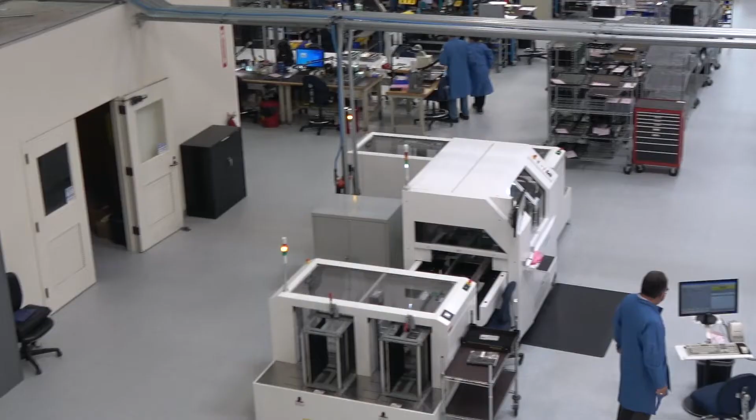Advanced Motion Controls was founded in 1987. The two gentlemen that founded the company are still involved in the business today. And that's important because the core values and the culture that the company started with have continued through today. We've shipped over 3 million servo drives around the world. Our headquarters is in Camarillo, California. We have an 86,000 square foot facility that houses all of our engineering, sales, support, design, and our manufacturing.

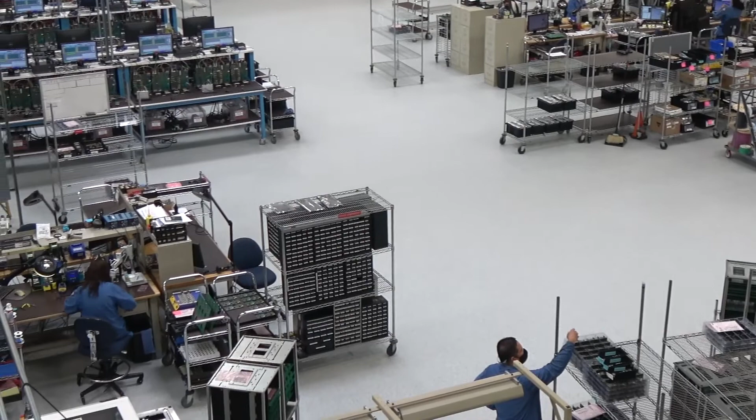One of the things that sets us apart are our people and our support capabilities. We have over 140 people here in the headquarters, of which 40% are degreed engineers. In addition to the support that you can get directly from the product and support group, we also make our development engineers available to our customers whenever it's needed to provide that extra level of support. Outside of our internal support, we have over 40 channel partners around the world with over 300 associates, and about 130 of those have been to the factory for training. And so we have factory trained support all around the world.

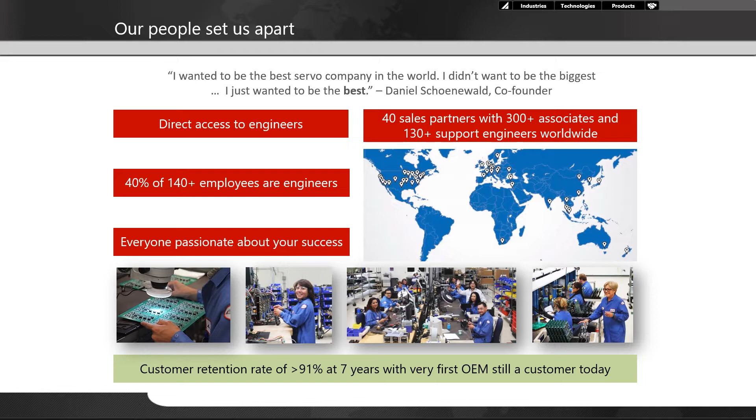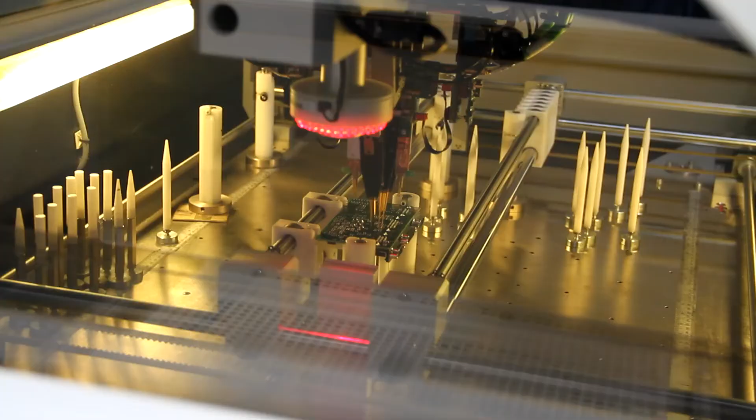One of the keys to our success is the flexibility that we have in manufacturing, because we have all of that manufacturing at our headquarters in California. We do 100% complete testing. Our flexibility allows us to prioritize and schedule to meet our customer needs. We routinely ship over 98% to our promise date and over 90% to the date our customer requests at the time of order. It also gives us great control over quality and reliability. Our average return rate is less than 0.5%.

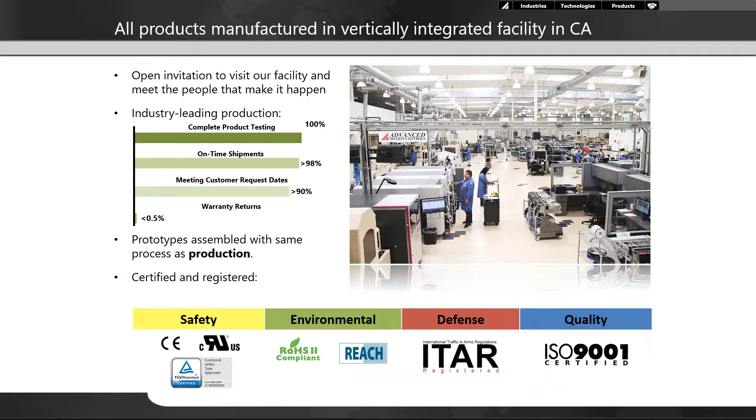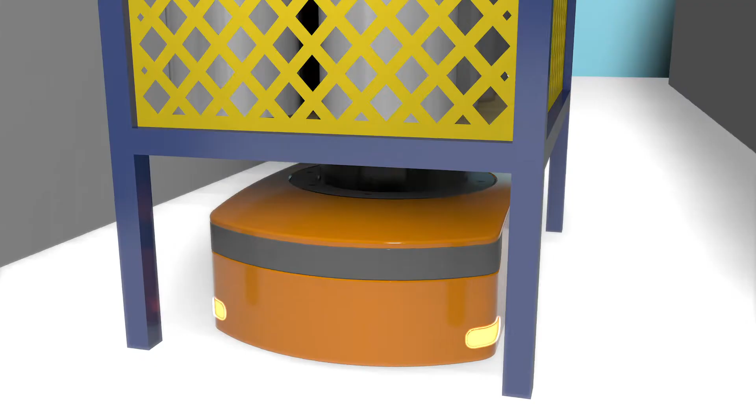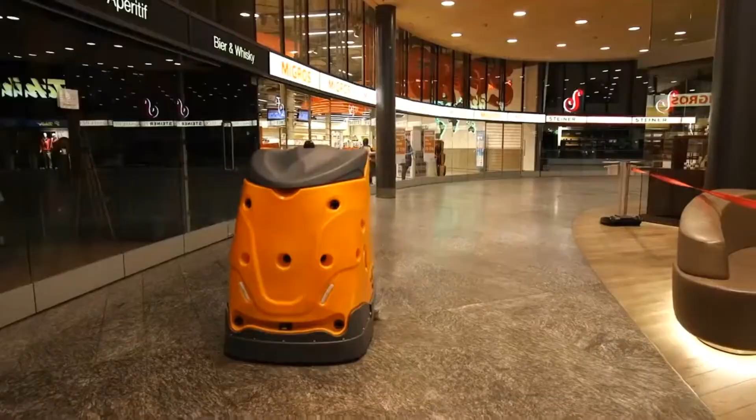All right, thanks, David. Today we're talking about servo drives for mobile robots and cobots. So I'm going to start with a quick introduction. Mobile robots can be used pretty much anywhere, but we're seeing exceptional growth in automated warehouses where AGVs are used to fulfill online orders, in hospitals, for example, pharmaceuticals. This is where a robot stores and transports medication to a patient's room in the hospital. Also in hospitals as service bots where they do laundry delivery, so delivering fresh linens to the rooms, or taking dirty linens to be laundered. Or even at grocery stores, in airports for automated floor cleaners. Also in grocery stores and big box stores, mobile robots are used for tracking inventory.

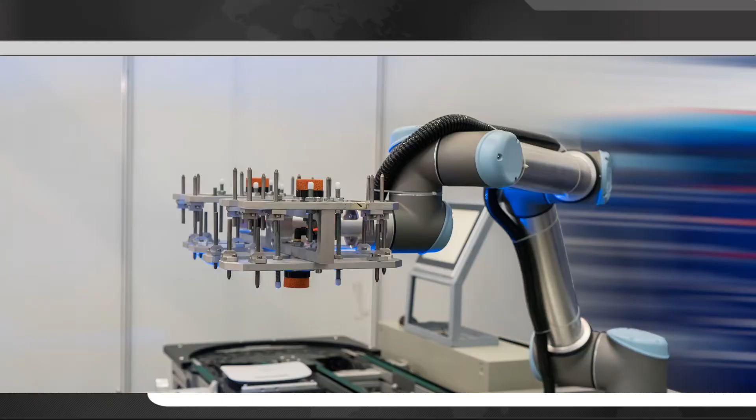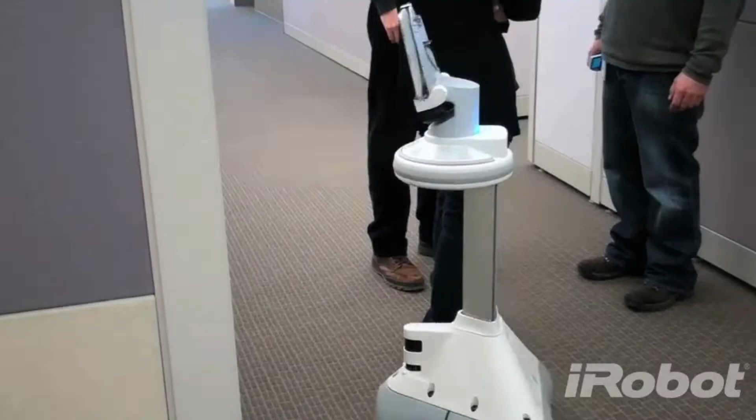Cobots or collaborative robots take the shape of an arm and are usually mounted to a fixed location, but they can also be mounted to a mobile platform, which allows them to move and work where needed. Cobots work in close proximity to people and other robots. They're designed to be versatile so they can handle a multitude of repetitive tasks like moving, sorting, packing, and assembly.

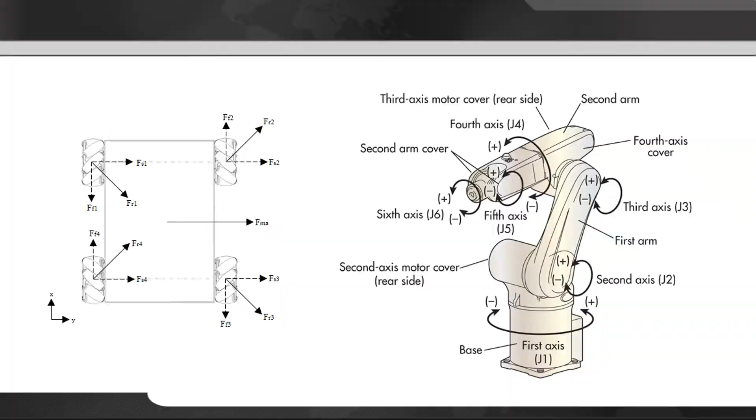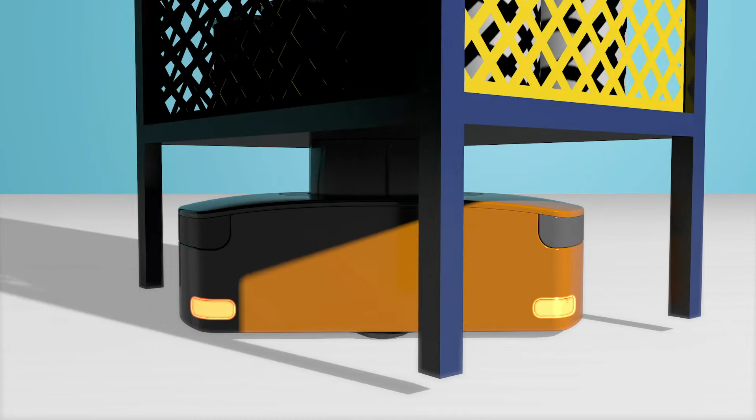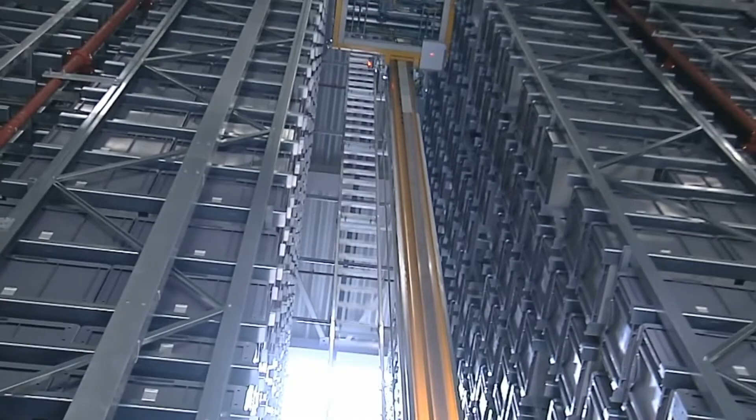In both mobile robot and cobot applications, for every axis of motion, there needs to be a motor to drive it. And to drive each motor with precision, there needs to be a servo drive to supply the power and motion control. This means for every traction wheel on an AGV, or every degree of freedom on a robot arm, there needs to be a servo drive. But regardless of the different applications and different jobs for each axis, when it comes to the servo drives that power them, mobile robots and cobot applications have a lot of requirements in common. So even if the application looks different on the surface, the requirements for the servo drives are actually similar.

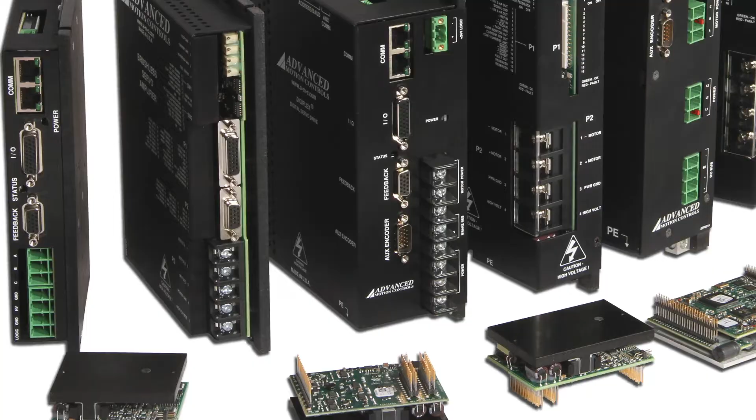So what are the requirements for cobots and mobile robots, and how does AMC fit in? First of all, we have 220 standard off-the-shelf servo drives to choose from. Within this group are a lot of great choices. So I'm going to break this down into the attributes that are important for cobots and robots.

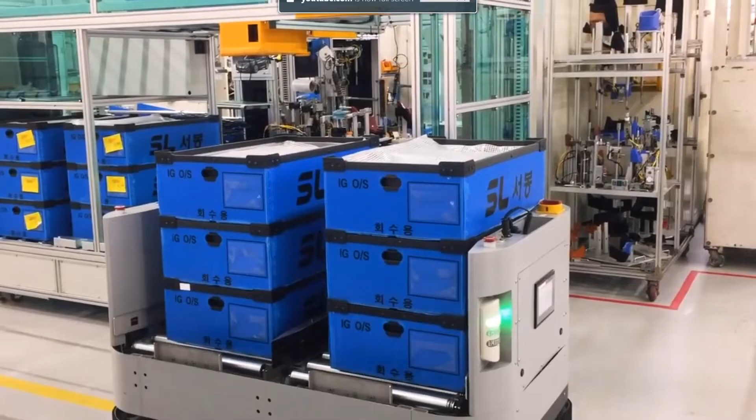With regard to voltage, compared to traditional factory applications, mobile robots and cobots operate with a relatively low DC supply voltage, typically in the range of 10 to 100 volts DC. This is mostly due to the availability of batteries and safety, although higher voltage systems also exist, for example with industrial robots and agricultural robots.

In the low voltage category, our standard products operate over a wide range. For example, 10 to 55 volts, 20 to 80 volts, and 40 to 175 volts DC are typical operating voltage ranges for our products. The benefit of wide ranges is especially important with battery applications because the difference between a fully charged battery at the beginning of a shift versus a drained battery at the end can be pretty big.

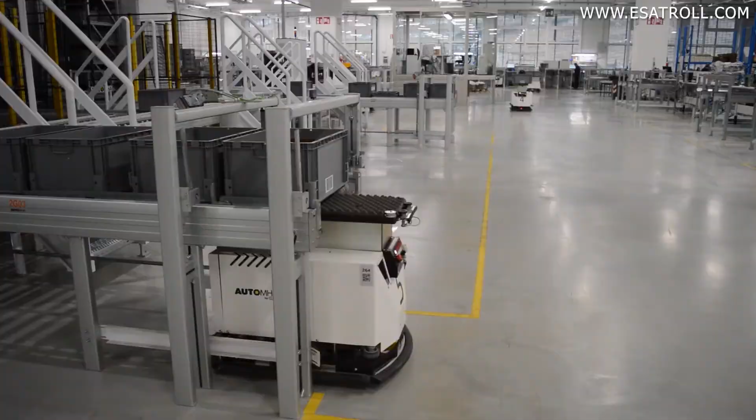And regardless of what the input voltage is, the servo drive performance should remain the same throughout the range, meaning the responsiveness needs to be the same as well as the torque output and tuning, although admittedly the top speed may suffer when the voltage is low.

Almost everyone wants more torque, which really means they need more current. Anywhere from 5 amps to 100 amps is a typical requirement and can easily be satisfied with our standard product offering. Even higher currents are available with some of our products like our vehicle mount drives. High current output is needed for axes like traction wheels on an AGV or the base joints on a robot arm.

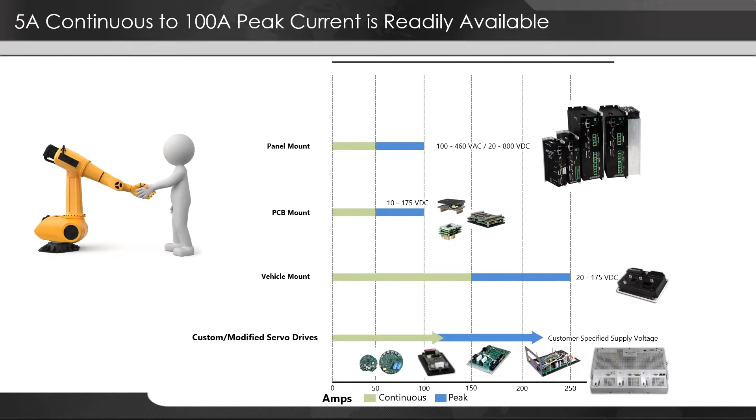Efficiency plays a critical role when batteries are the source of power. The higher the efficiency, the less wasted energy. This means robots can run longer because their batteries last longer. At AMC, all of our products use some form of PWM switching, which makes them inherently efficient.

The point is, the power devices, either the FETs or IGBTs, turn all the way on or all the way off, with very little time in the linear region where energy is wasted. The result is efficiency, usually between 95 and 99%, depending on the model. More efficiency means longer battery life.

Also, being more efficient goes hand in hand with being more thermally efficient, which means there's less heat generated by the servo drive. This is extremely important when space is limited, like with cobots and mobile robots, because when servo drives and other electronics are packed into tight spaces, the heat tends to build up. Thermally efficient electronics are much easier to work with because they run cooler.

Another consideration for efficiency is we have 4-quadrant operation, including for single-phase and 3-phase servos, as well as trapezoidal and sinusoidal commutation. 4-quadrant means the servo can push current in both the forward and reverse direction, as well as regen in both directions. So what's regen or regeneration? This is when the power flows from the motor back to the supply during braking.

In the past, this was often considered a nuisance, since it would cause overvoltage issues and make machines shut off. But now with battery applications, regeneration is a desired feature. It's actually an integral part of maintaining the highest amount of efficiency and recovering as much spent energy as possible. In the past, excess regeneration energy would be burned off in a resistor. Now it's used to recharge the battery.

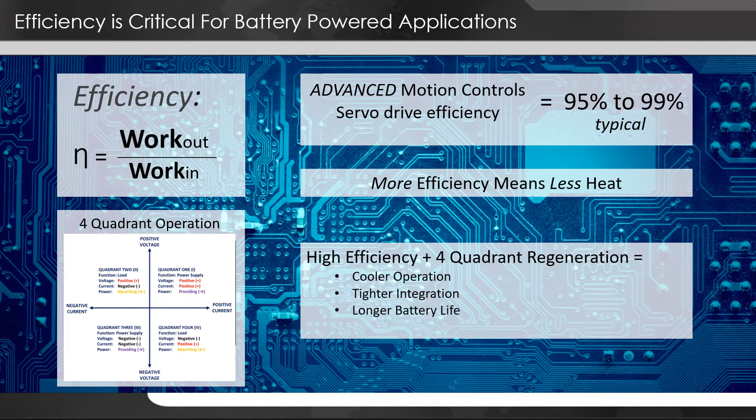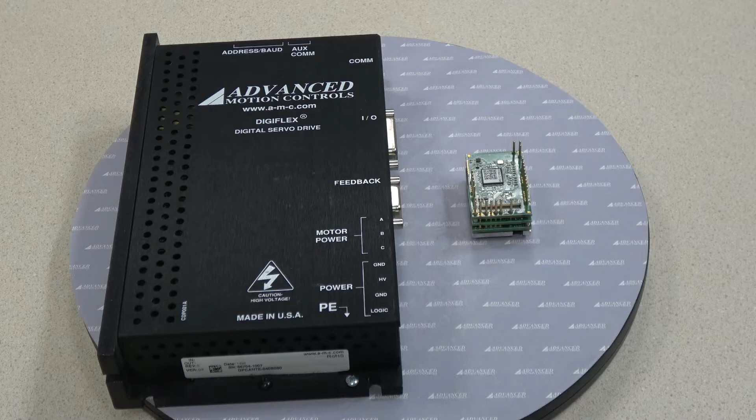Our products are not only known for their high power, but their high power density. In simple terms, high power density means increasing the amount of power per volume. If you provide the same amount of power but in a smaller package, then you've increased the power density. For example, these two servo drives can output about the same amount of power, but this one has much higher power density since it is so much smaller.

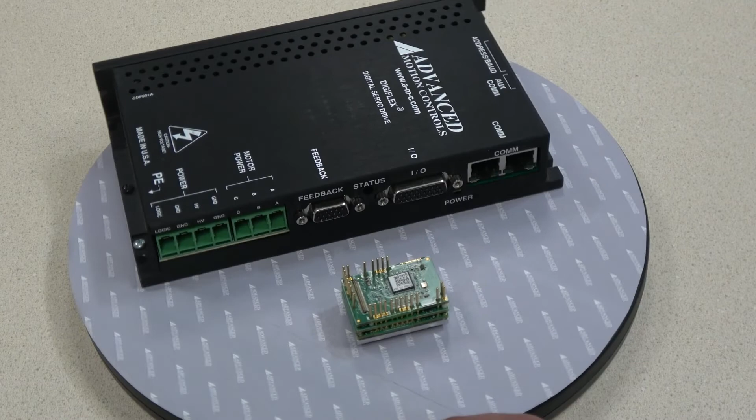The advantage of high power density is it makes it easier to fit more power into a smaller space, an extremely important consideration in AGVs and robotic arms. Also, with the smaller physical size comes reduced weight. Every gram of mass saved increases the payload capacity. The reduction in dead weight also helps with overall system efficiency because there's less weight to move around, accelerate, or lift.

Networked servo drives are definitely the way to go with cobots because they greatly simplify wiring. A compact drive on a network can be mounted right next to the motor in a cobot arm. All the feedback signals can then be processed in the drive along with any I/O signals.

The servo drive can then make the signals available on the network for the controller to access. This eliminates most of the wiring that would otherwise have to feed down the arm. Multiplied by each axis of motion in the arm, this means 50, 75, or more wires can be eliminated.

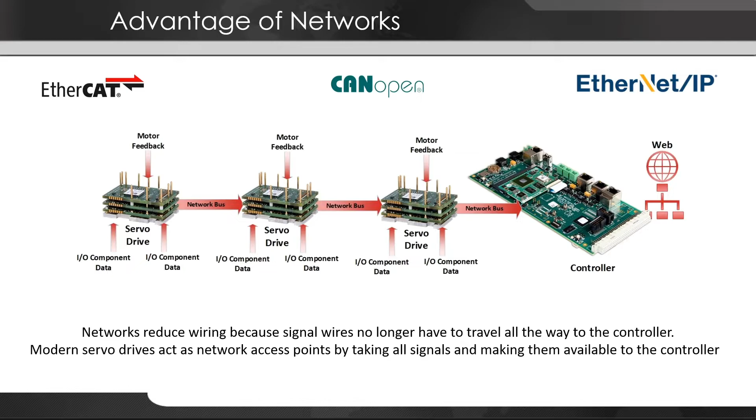Safety is a top concern because AGVs and cobots work near and around people. Safe torque off, or STO, cuts all power to the motor. This safety feature is necessary when someone is servicing a robot because there needs to be absolute certainty that a motor can't suddenly turn on and accelerate, causing injuries.

People might equate this to an inhibit function, but this would only be half right. The difference between an inhibit and safe torque off is the inhibit is done solely through the servo drive's logic. This means a logic glitch or poor grounding could allow the motor to start up again. With safe torque off, the drive's logic is taken out of the equation.

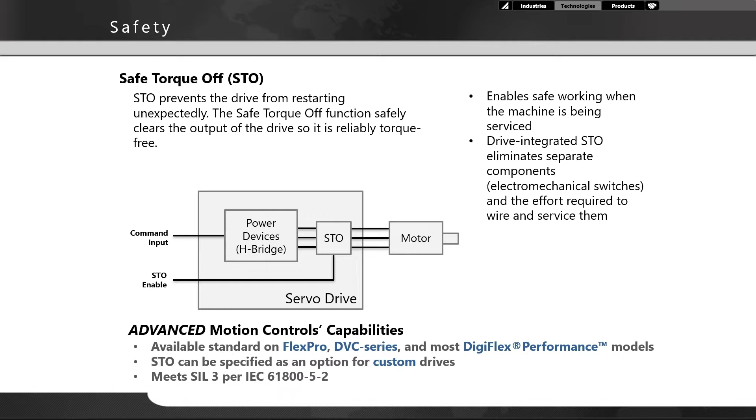With STO, there's a physical disconnect on a hardware level between the drive's power devices and the motor phase terminals, making it virtually impossible for the motor to accidentally start up. To start the motor again, STO must be disabled manually before the drive can be re-enabled.

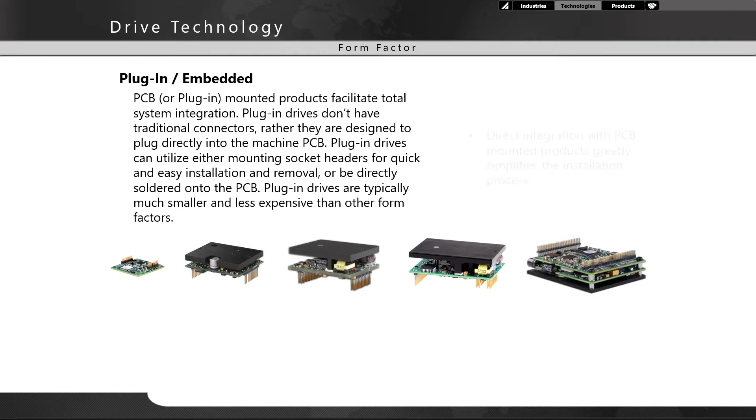Form factors. PCB mount is our most integrated form factor. With this style, you design your PCB to accept the servo drive directly on the board. To get the full advantage of this form factor, you would design the PCB board in such a way as to be laid out in the shape that you need, and if necessary, include multiple axes on one board.

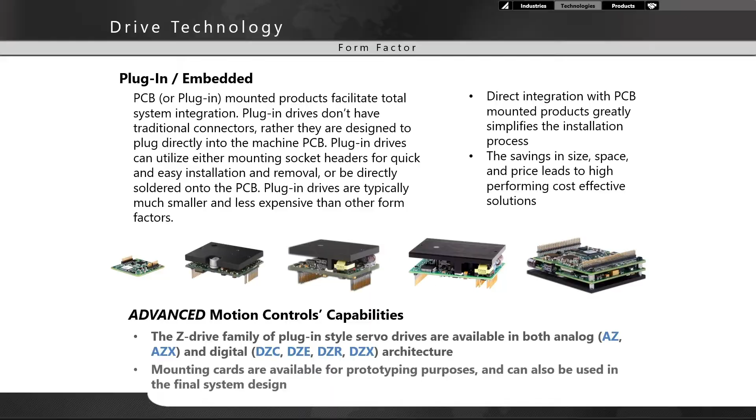Further advantages can be achieved by designing easy connection to the motor and feedback cables, as well as tying together the network comms, especially if there are multiple axes. Traces and connectivity for I/O should also be included. Think of the PCB mount form factor as an easy way to do your own custom, but you don't need to design the servo drives. You just need to integrate them.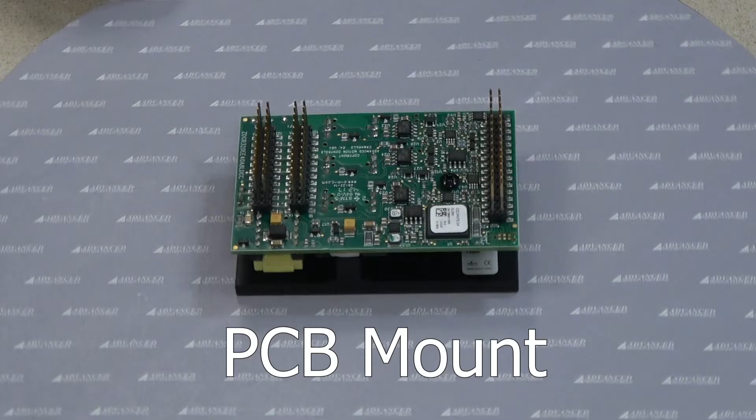The advantage is the tightest integration with extremely reliable connectivity since cables are replaced with traces. Disadvantage, it's an open design, so not as protected, and you need to really plan out the layout and connectivity since it's more of a commitment to spin a dedicated board.

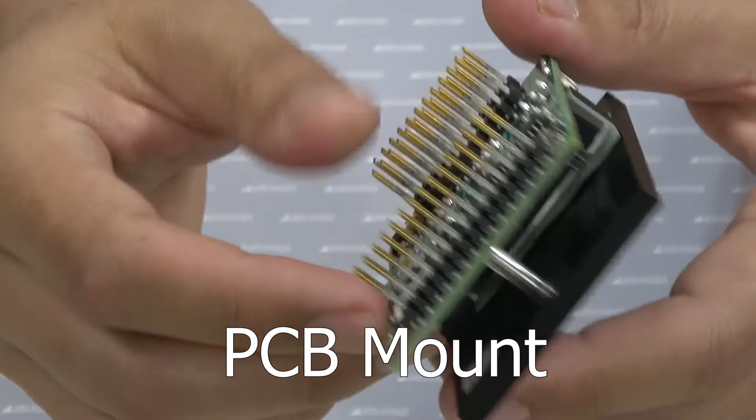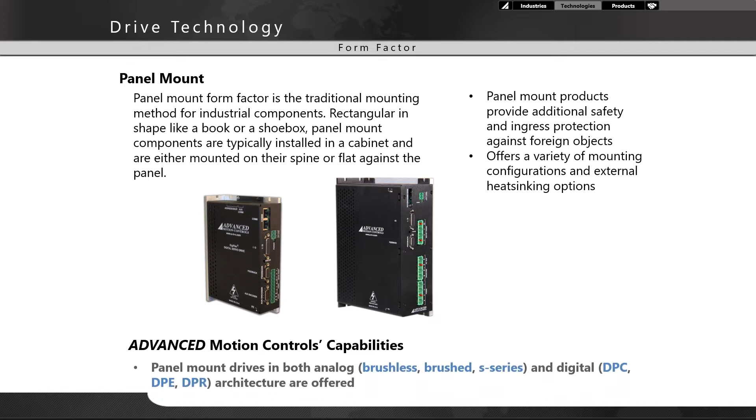Machine embedded is similar to the PCB mount style, but with an interface board attached. This allows for more traditional connections like cables with connectors. Advantage, it's more standalone. Disadvantage, it's still an open design. Panel mount, this is the traditional servo drive in a rectangular case. They're larger than the embedded style of drives, but they have bigger connectors and sturdier mounting options.

Advantage, they're well protected with a metal or plastic cover, larger connectors with easier access. Disadvantage, these may be harder to place due to their size. They're also heavier.

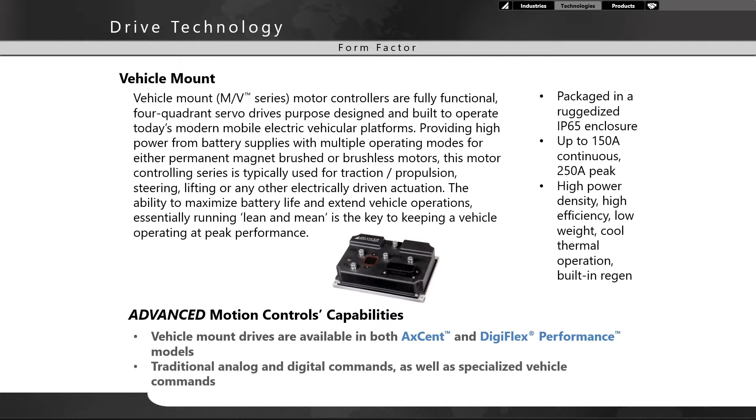Vehicle mount, designed with electric vehicle requirements in mind, although they're still servo drives, so there's no sacrifice in performance. They use automotive style connectors for signals and large lugs for power. So the advantage, it's the most protected design. It's a heavy duty build. Disadvantage, it may be too bulky.

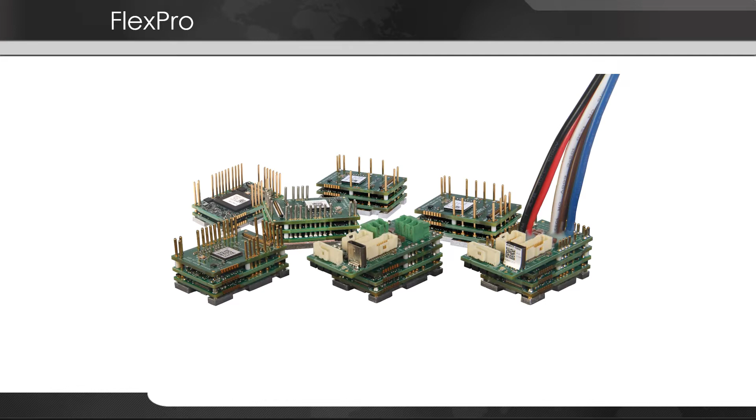Let's focus on FlexPro. FlexPro is our premier line of servo drives. They're a showcase of our latest technologies and capabilities and are designed for high power and small size. With our impact architecture, we've achieved incredibly high power densities while still maintaining our reputation for reliability and versatility.

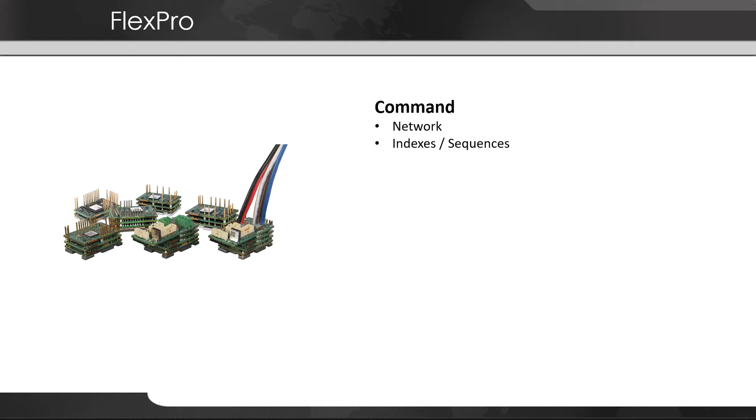FlexPro drives are designed to operate within a network, but like previous digital drives, they can also operate standalone with control via stored indexes and sequences using I/O. They're capable of running brushed, brushless, stepper, rotary, and linear motors.

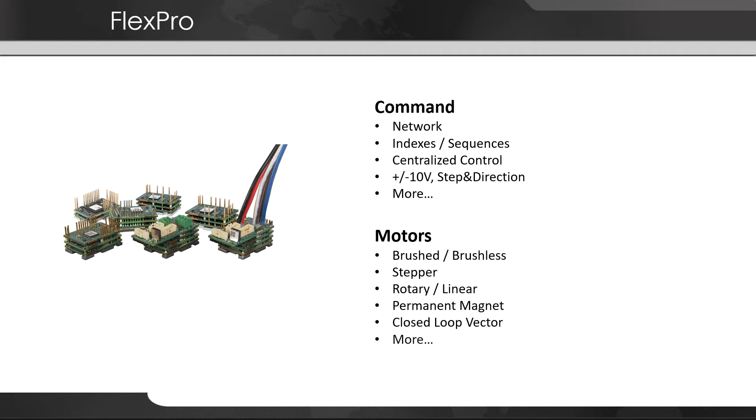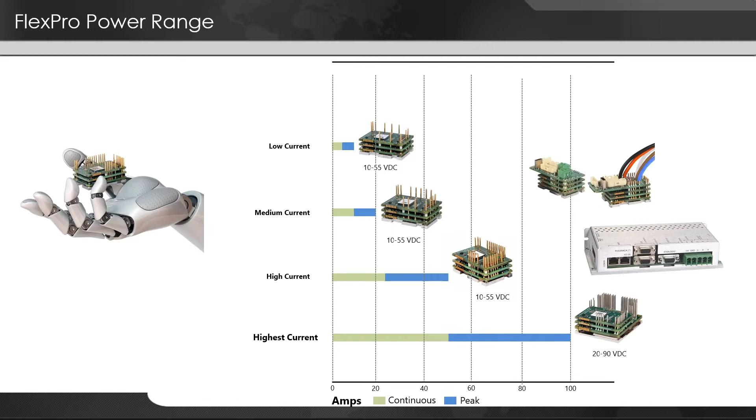They range in power from as low as 5 amps continuous up to 50 amps continuous and 100 amps peak. For voltage, they work with as low as 10 volts DC up to 90 volts DC, with options up to 200 volts DC in the near future. We offer two sizes, the micro and the mini.

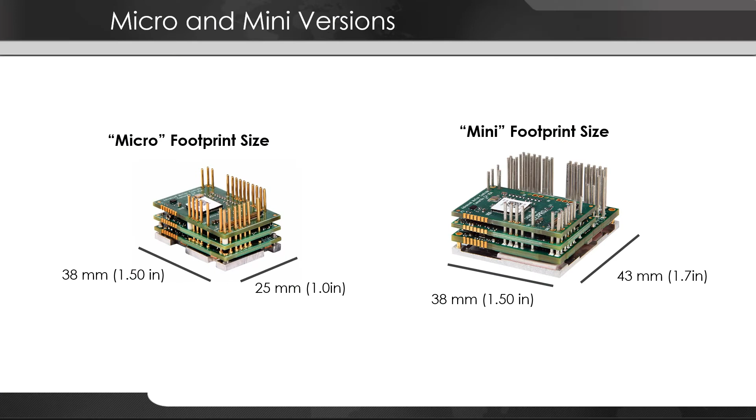The micro size has a footprint of 38 millimeters by 25 millimeters, which means 4 of these can fit onto a business card. The mini size has a footprint of 43 millimeters by 38 millimeters, which means 2 of these can fit on a business card with room to spare.

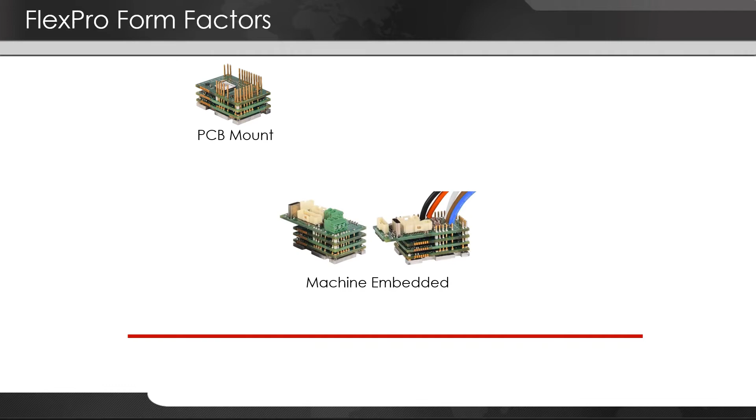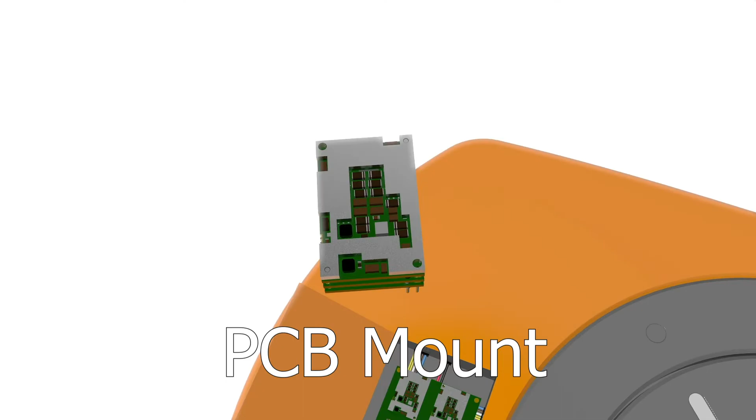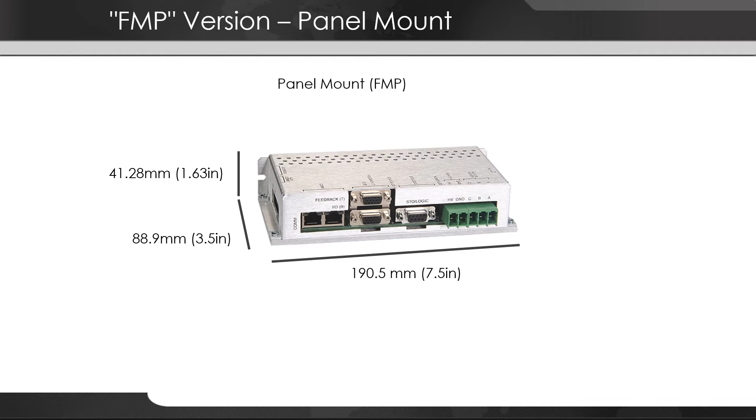Form factors. FlexPro drives come in 3 form factors. PCB mount for fully embedded and integrated installations. These are great for multi-axis applications; we can mix and match as many FlexPro drives as you need onto a single PCB. Machine embedded, these drives are the halfway point between PCB mount and panel mount. They have an open, caseless design, but they use standard connectors and lugs for connectivity. Panel mount. This is the traditional rectangular case that most people associate with servo drives.

And one more form factor worth mentioning is the development board. Since the FlexPro models are so small, we also have available an embedded style FlexPro mounted to a larger PCB with full-size connectors for main power, network, motor power, and feedback.

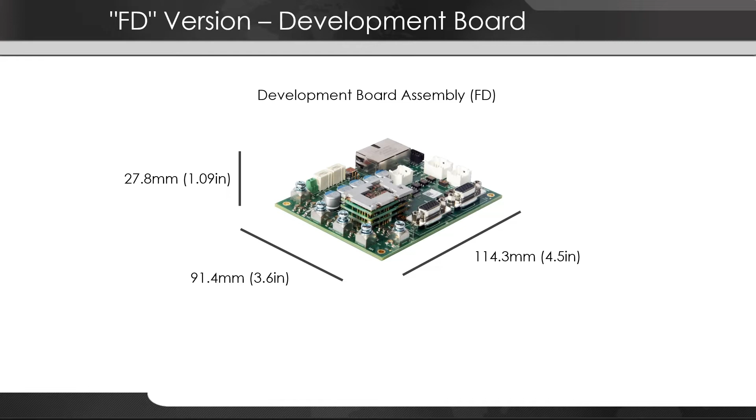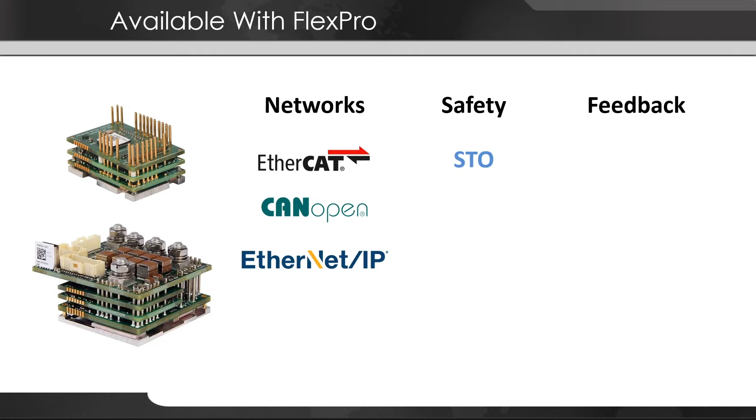The FlexPro family has options for EtherCAT, CANopen, and EtherNet/IP, giving full control and access to drive stats and I/O over the network. For safety, all FlexPro drives include STO functionality. Feedback. FlexPro drives have numerous feedback options including absolute encoder, BiSS-C, EnDat, incremental encoder, Hall sensors, and more to come.

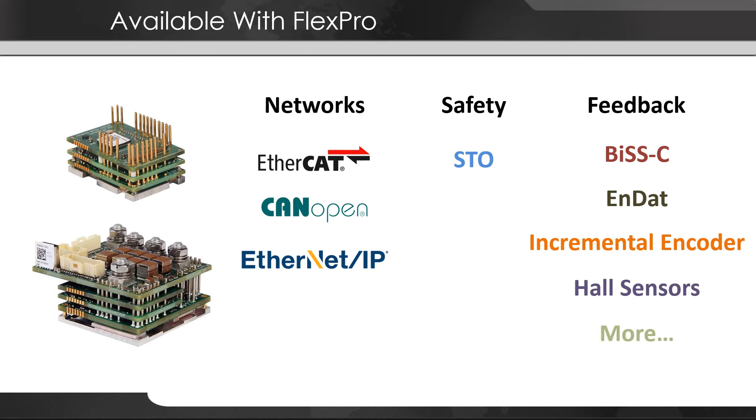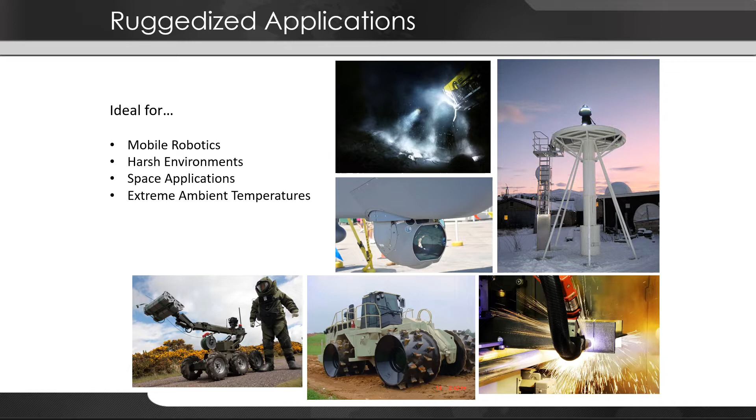Extended environment. FlexPro has a complete subset of models designed to operate in extended environments. They've been ruggedized to work in different applications like high temperatures or high vibration, both of which are common with cobots and mobile robots. They have an extended temperature range of -40 to 95 degrees Celsius.

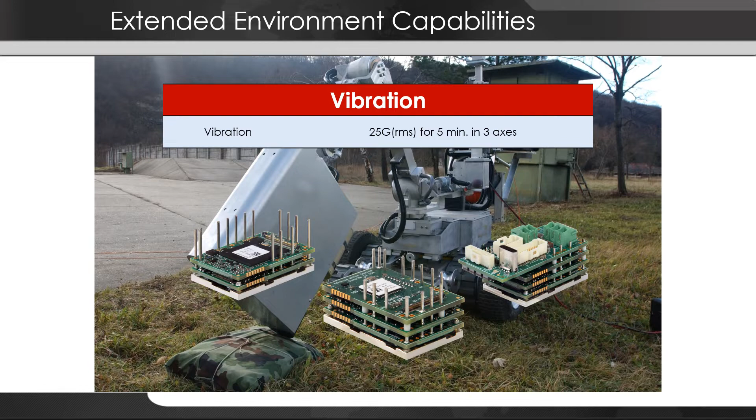They're protected against 95% non-condensing humidity and pollution degree 2, and they're tested to withstand vibration up to 5 minutes of 25 Gs RMS in 3 axes of vibration.

Thanks, Rene. That was great.

In addition to all these standard products, and you can go to our website and see them all online, that only represents about 1/3 of our revenue. Another third of our revenue are modified versions of those standards. So we can tweak small things like resistors, capacitors, maybe even special firmware, things like that.

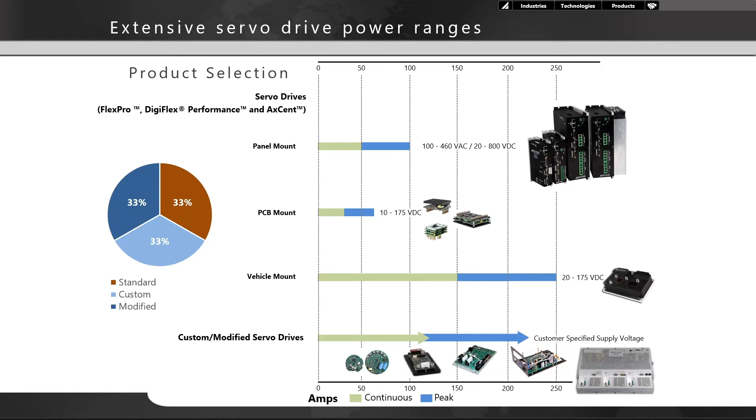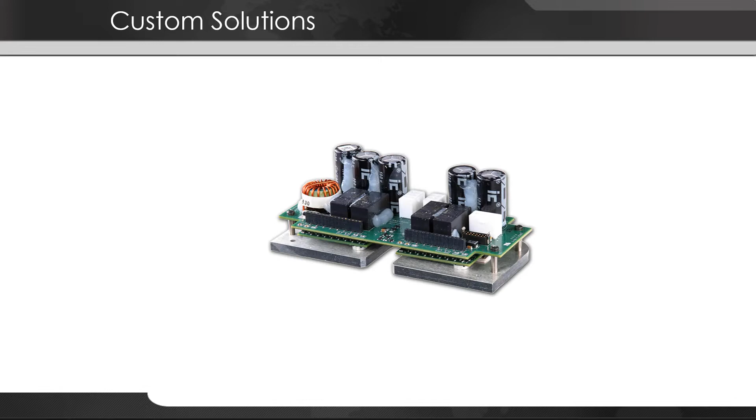But then the final third of our revenue is custom solutions, where we are taking our core building block, a standard product, the standard circuits that go into that product, and customizing it for shape or power, voltage, current, inputs and outputs, special connectors, things like that, to give the OEM customer exactly what they want.

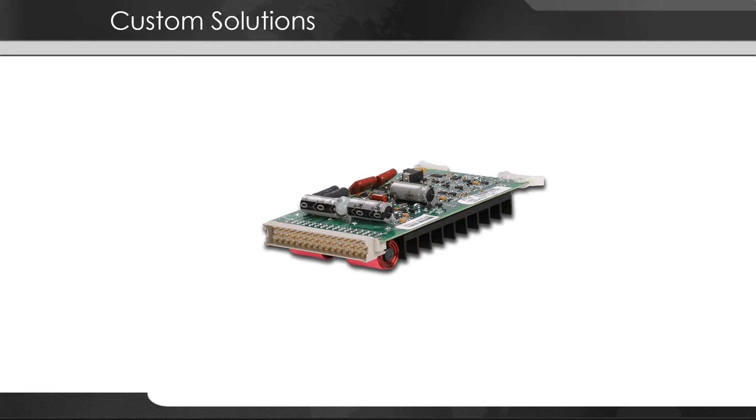One of the keys in getting good to great in mobile robotics is being able to have a solution that's optimized for the application. Every application is different, every customer's needs are different, and the ability to customize on the product level, and sometimes even on the commercial level, is very important.

And the way that Advanced Motion Controls is structured lends itself very well to being customized and optimized. And we like to think of ourselves as an extension of our customer's engineering team. So we have a very close collaboration between our applications department, our engineering group, as well as the customers.

We build all of our prototypes on the same equipment and the same process that we do for our standard products. So we have that proven recipe already built in. And our experience of over 30 years, coupled with our in-house facilities and capabilities, produce reliable custom solutions much faster than the other suppliers in the market. Many of our competitors don't even offer custom solutions.

So an example of one of our custom applications is a floor cleaning robot. The customer had started using one of our standard embedded style drives plugged into their own mounting card and an IP65 enclosure. And they recognized that their forte was building robots and the controls of robots, not necessarily the drive itself. So we collaborated on a turnkey solution where we provided a fully enclosed IP65 totally sealed solution. So the building block was still that standard drive.

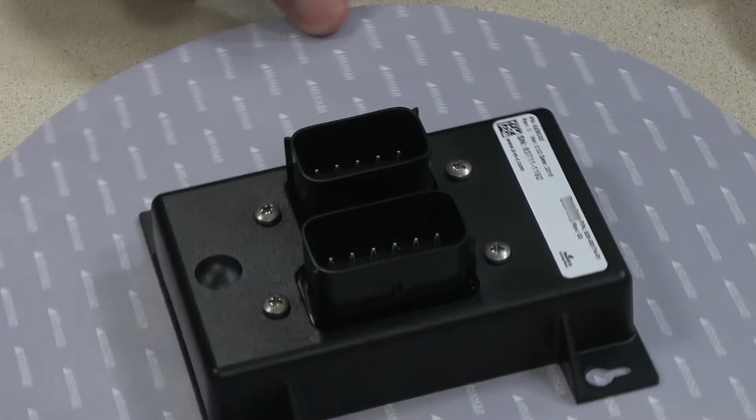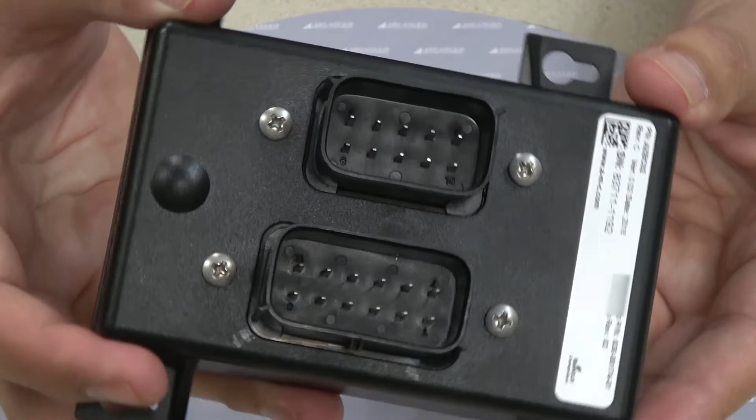We created a mounting card that had exactly the features that they needed. It was the same size as their own design, so the fit was the same. We mimicked the function, so there were special relays, temperature control, safety mechanisms that they had designed on their mounting card, and we put that onto our design. Added a couple waterproof connectors, put that into a plastic housing and completely filled the cavity with potting compound to make a 100% sealed solution.

This gave them the ease of buying one part, taking it right from their stock, mounting it right to the robot in the same fashion that they had mounted their own design with the same cables, because we had used the connectors they used. It lowered their costs, increased their quality, and made it simpler for their supply chain because now they were buying just one part as opposed to all the different parts to put together that assembly.

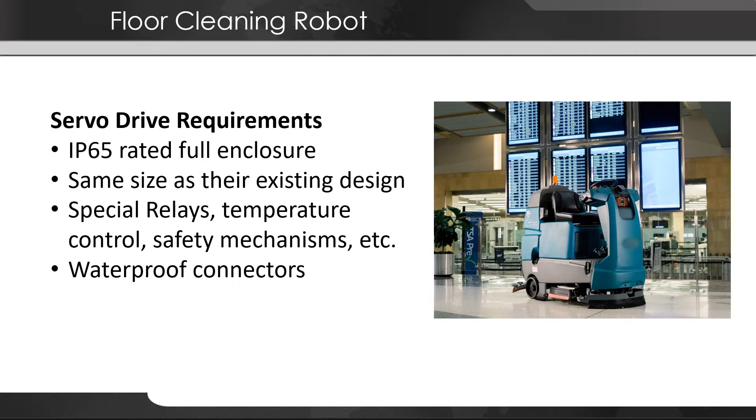Another one of our custom examples is a customer making an articulated robot that goes on top of a mobile robot. For the articulated part of the robot, it was very important to keep the size as compact as possible. And to do that, they wanted to have the drive fit right in each joint of the robot. So it had to be small, circular, and donut style with a hole in the middle for wires to go up through the drive to the next joint and the joint after that. This was an EtherCAT solution, so the communication between the host and our drive is EtherCAT.

We worked together with the customer to determine the exact size, the exact mounting holes, and what was very important was efficiency, because there's not a lot of extra space to mount the power devices, which are the heat generating part of the design, to the metal housing. So we had to be very efficient to allow for natural cooling.

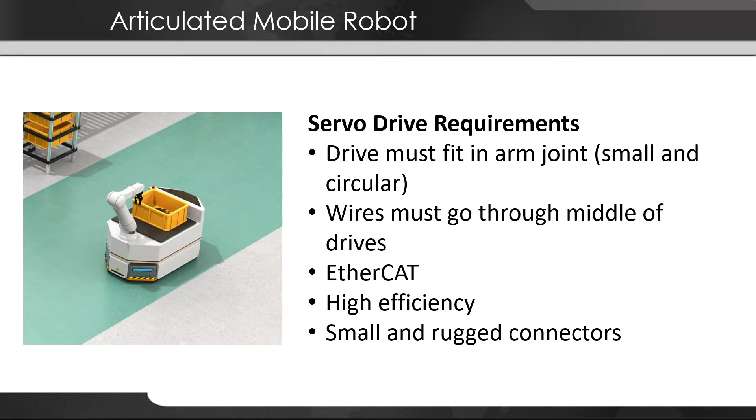And the other issue that was very important to them was connectivity. They had very specific requirements when it came to connectorization, because the connectors had to be small to keep the whole design small, but they also had to be very rugged and reliable, because this 6 degree of freedom robot is moving a lot.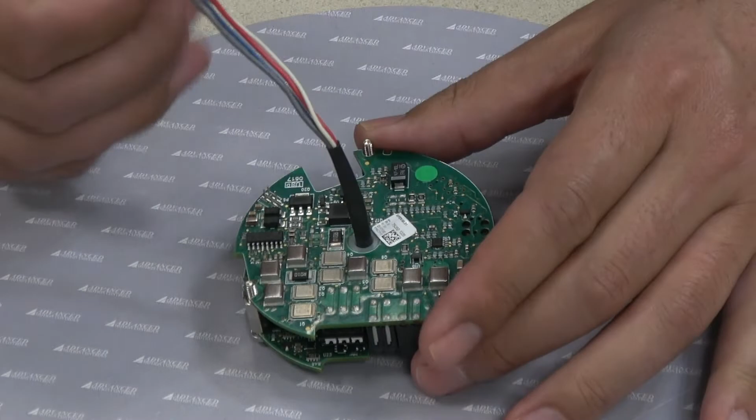And so there's going to be stress on the wires as it's moving around. So the ability to have robust connectors was very important. In addition to that, we added some features just for them: a special brake function, a special torque sensor function, in addition to sensing the torque of the motor, and a couple other features that will set them apart from their competition. And it was a really good example of how the two engineering teams working together as one could produce something better than either they or us could do by ourselves.

Another application was for a different floor scrubbing and floor cleaning robot. And the special need in this application was dual axis. So they wanted to have 2 axes on one drive, and all of the filtering necessary for them to meet their emissions requirements. A lot of times customers will handle emissions external to the servo drive itself, but in this case they wanted a turnkey solution where they did not have to add any additional equipment or accessories to the drive in order to get it to pass the testing that they required.

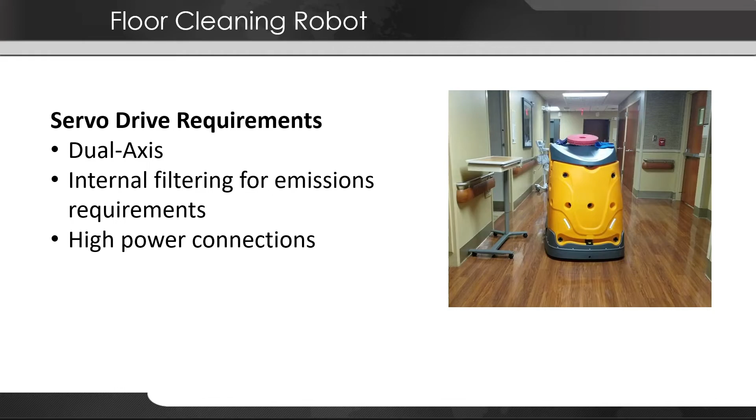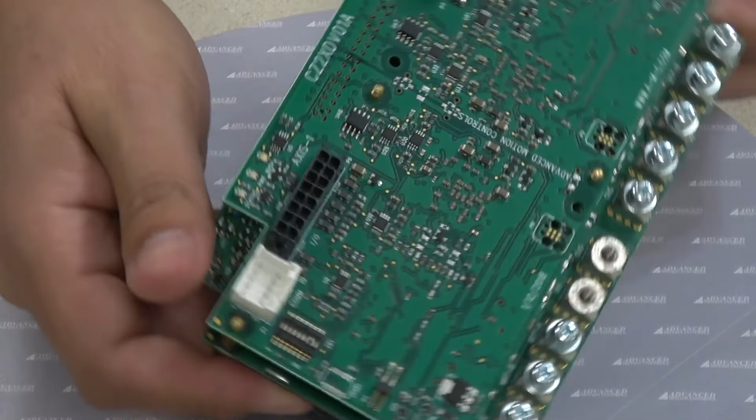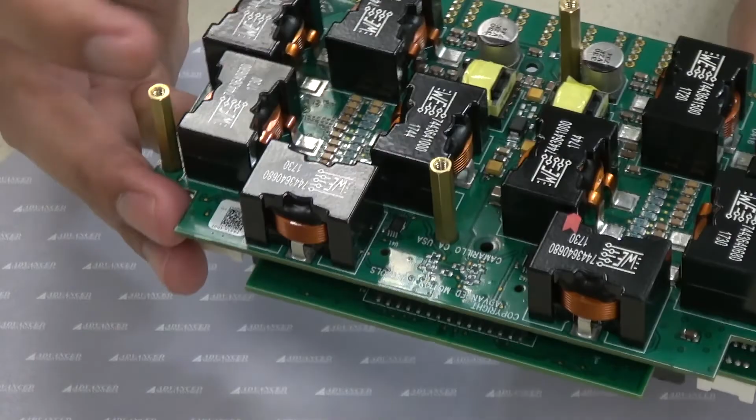So we took 2 standard embedded style drives that were slightly modified for voltage and current and installed those on a custom printed circuit board, acting as their mounting card, with high power, high current lugs for the input power and the output power to the motor, as well as the signal connectors of their choosing. So they had exactly what they wanted, and that helped them with their cabling. And on the opposite side of the mounting card, all of the inductors and filters necessary to keep the EMC and the emissions both conducted and emitted to a level that they required.

Again, this helped them ease their supply chain by being able to buy one part as opposed to maybe 2, 3, or 4 different pieces to put together themselves. They could buy one part and stock it, which kept their costs down and made it much simpler to stock the product as well as manufacture the product.

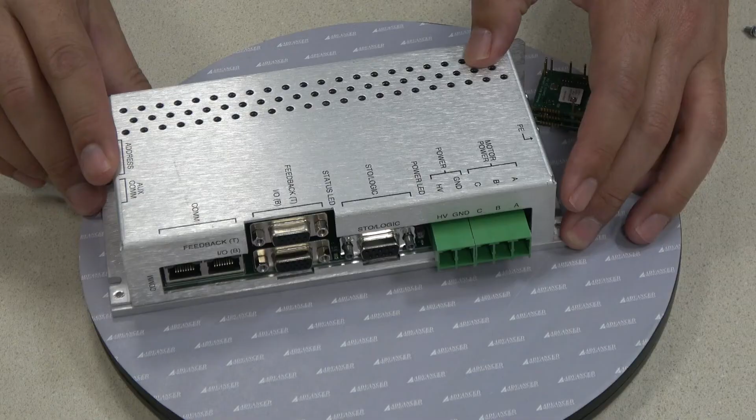One of our customers was making a mobile robot that is being used in a factory where EtherNet/IP is the network of choice, the communication protocol of choice. And so we had EtherCAT products, which were very similar but different. And the EtherCAT product that we had was an embedded style amplifier. So they liked the amplifier, they liked what it could do in terms of capability and performance, but they needed a different network, and they needed it to be in a housing with connectors so they could mount it in a panel. So this is an example where we started with a building block, and it was actually our FlexPro building block, and we were able to replace the EtherCAT portion of the drive with an EtherNet/IP interface. So the power and the controls stayed the same, only the network and communication option was added.

And then we took this drive and put it into a custom mounting card. And the custom mounting card had a power supply that took the bus voltage from the battery of the mobile robot and turned it into the voltage necessary to run the logic of the amplifier. We added the connectors that they wanted for the power, the motor. They wanted D-sub connectors for the inputs and outputs. They told us which USB connector they would like to have, the types of switches to be able to set the addresses for each axis. And we even included fans to provide active cooling, and they blow over the drive when the drive gets to a certain temperature in order to keep all of the electronics in the zone that we want them to be to operate properly.

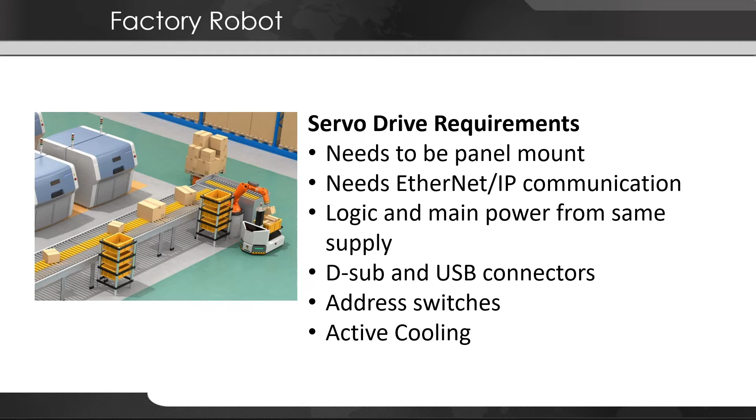All right, so our first question to our esteemed panel: how did you prevent signal interference on the board's signaling circuit from the passing wires? So I believe I saw that question pop up when we were doing the donut-shaped board, so maybe it's when the wires pass through there. So I'll leave it to you, either David or Keith, to answer that. I can take that.

It's a good question. Electrical interference, both conducted and emitted, is always a concern. And there's three main ways that we take care of that. The first is the circuit design on our board to limit the amount of noise that we put out from the switching power devices. We have techniques that are part of our IP that reduce the amount of noise emitted. We also have circuits that we put on our boards to decrease the susceptibility of interference from outside sources affecting the drive. So those are circuit designs that we use to mitigate those problems. That's number one.